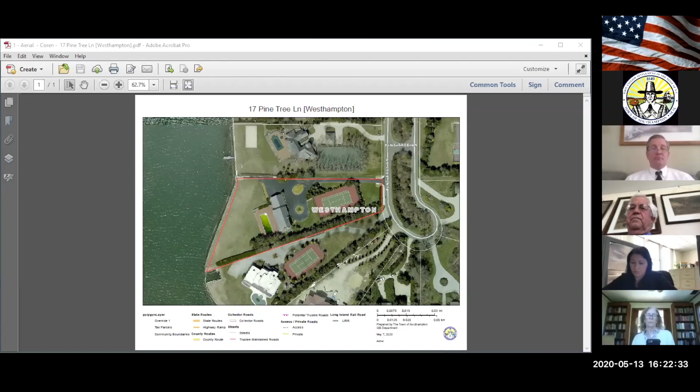Good afternoon, Marty Shea, Chief Environmental Analyst for the town. This is an application filed to gain approval to undertake residential improvements at an existing developed property. The applicant is seeking a wetlands permit in order to demolish and replace the existing pool as well as the associated deck. They're looking to significantly reconfigure the driveway. They're also planning extensive accessory improvements landward of the residence.

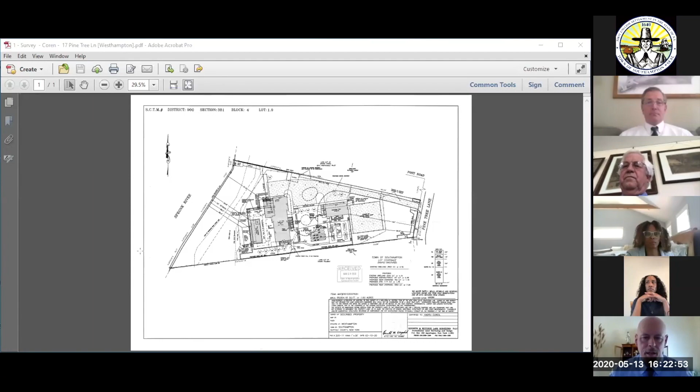As you can see by the survey and the aerial photograph, this property is characterized by a bulkhead. The bulkhead was failing, so the Board of Trustees issued a permit to replace it. When I completed the site inspection, work was underway on that bulkhead reconstruction. I had recommended to the applicant that they establish a covenanted, naturally vegetated wetland non-disturbance, non-fertilization buffer extending 50 feet landward of the bulkhead in order to mitigate potential adverse wetland impacts.

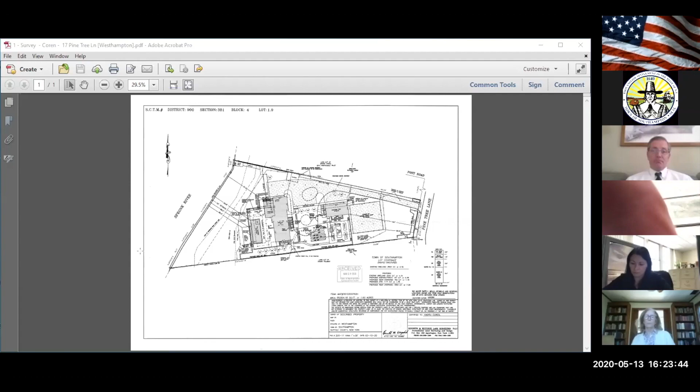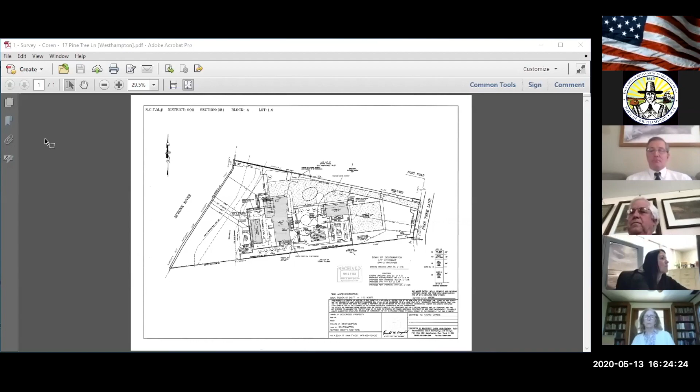I'm happy to say that the applicant has since come back with a revised survey showing that recommended buffer. They've also provided an acceptable revegetation plan, as the buffer area is currently characterized by lawn. The existing lawn is going to be removed and replaced with native plants. The project plans as currently proposed do meet the standards for issuance of a wetlands permit, and we have sufficient information to make a determination on the application. As such, I'm recommending that the hearing requirement be waived.

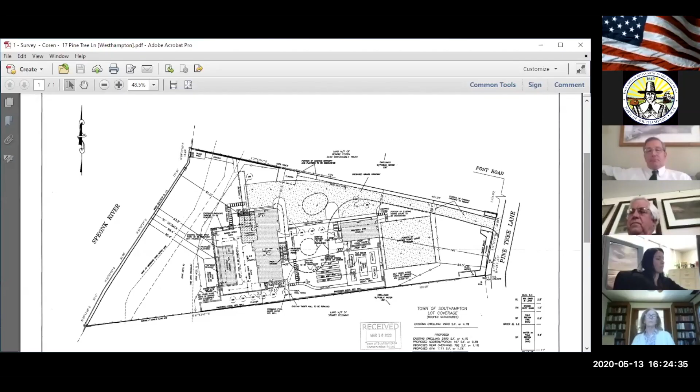The next application is A190130, Stephen E. Summer, and the applicant requests a postponement.

Is there a motion to postpone? So moved. Second. All in favor, say aye. Harry Ludlow, aye. Tom Rickenback, George, aye. Hine, aye. Jeremiah Collins, aye. Mike Tessitore, aye.

The next is A19068, LWF Enterprises LLC. As indicated by the visual, this application relates to a property located at 40 Shinnecock Road in the hamlet of East Quogue. The property is bulkheaded and contains town-regulated tidal wetlands. The application has been filed in order to legalize the redevelopment of this property.

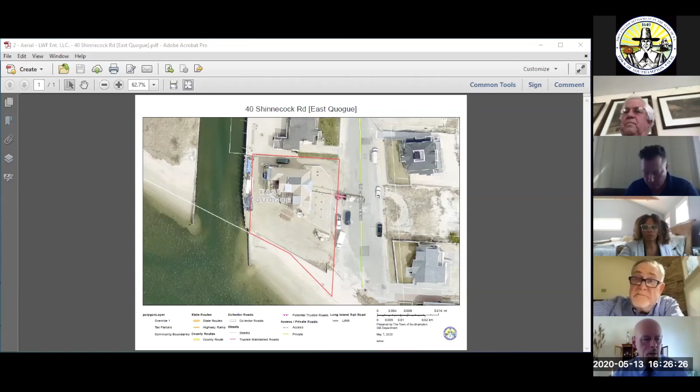The Conservation Board had previously issued a permit to authorize that redevelopment. However, when the property was inspected by my office in order to see whether or not we could close out the permit and issue a certificate of wetland compliance, we found that significant modifications had been made to the residence that needed to be legalized and authorized by this board.

The Board of Trustees had issued a permit to allow for a bulkhead reconstruction. Those activities had resulted in significant disturbance of covenanted, naturally vegetated wetland non-disturbance, non-fertilization buffers, whose establishment was a condition of prior Conservation Board permits. So we advised the applicant that they needed to submit a new application to this board in order to rectify the matter of the disturbance in order to legalize the completed construction.

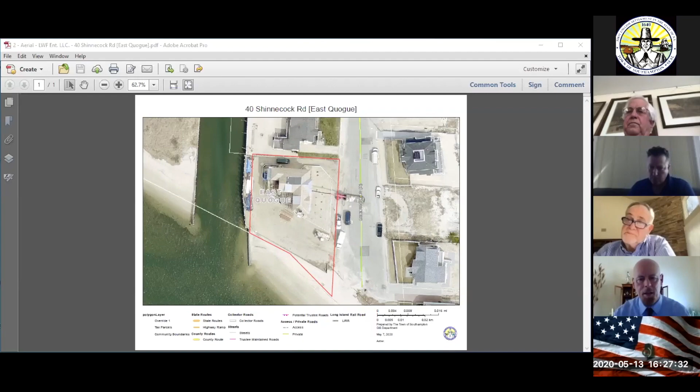Although we had significant concerns about the backfill for the bulkhead, when I recently visited the property, I found that as a consequence of wind and water erosion, the impacts of the backfill had significantly lessened. The buffer by planting grass is consistent with my requirements.

While there was a need to replant portions of the buffer and also to remove an unauthorized hard surface walkway within the buffer, the applicant has since complied with my request and completed that reclamation. So although the project was modified, its impacts are being sufficiently mitigated by the establishment of these restored buffers. So there are no other outstanding issues at this property. We have sufficient information in order to make a determination.

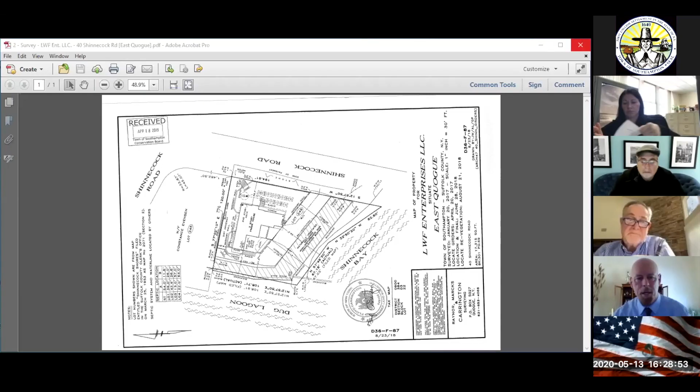As such, I'm recommending that the public hearing requirement be waived. Motion to waive the public hearing. Second. All in favor of waiving the public hearing, say aye. Harry Ludlow, aye. George Hine, aye. Jeremiah Collins, aye. Mike Tessitore, aye.

Next application is A019073, Blair Mezibov and Jenna Klein. This application relates to a property at 8 Jagger Lane in the hamlet of Westhampton. The proposed action is classified as a type 2 action pursuant to SEQRA. There is a preliminary advisory report on file. We're fortunate to have with us this afternoon the architect for the project and the owners of the property as well.

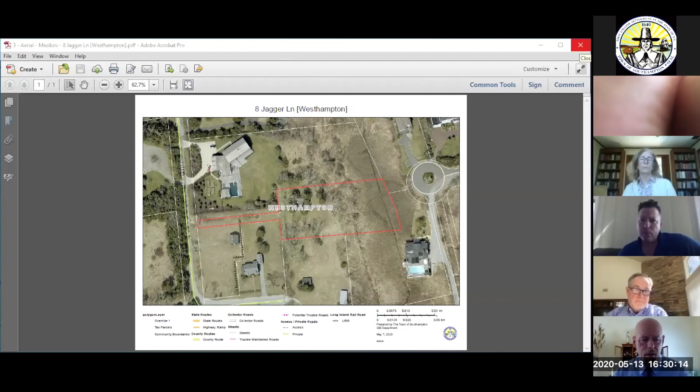The parcel is characterized by a small one-story residence. The applicant had commenced improvements to that residence, including conversion of a front porch area to living area, and had also commenced work on a rear porch area. As a consequence of that commencement, without the required approvals, the landowner did receive a notice of violation.

The applicant, as you can see by the survey, is seeking approval to retain the existing residence, but to elevate the house so it's FEMA compliant, and also to expand the house in the front and rear, as well as to build a swimming pool and various deck areas.

There is an existing sanitary system located close to the wetlands. The wetlands consist of town and state regulated tidal wetlands, primarily reedgrass marshes and high marsh. Those wetlands act as an essential tributary to the Moriches Bay.

The house that exists on the parcel today could be characterized as pre-existing non-conforming in that it doesn't comply with the minimum required 100-foot wetland construction and 75-foot natural buffer setback requirements as set forth in the permit issuance standards in Chapter 325.

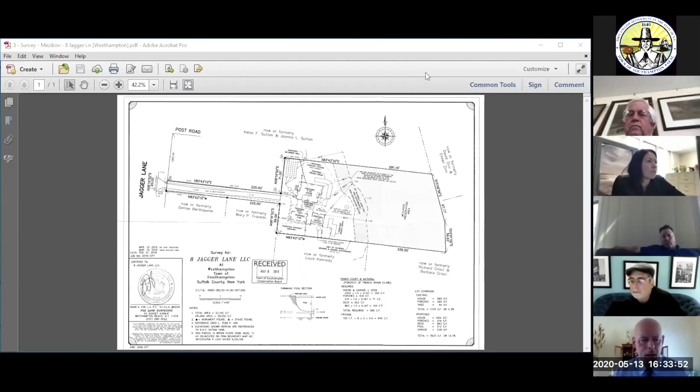As the board knows, where you can't meet the required wetland setbacks, the law asks that the applicant undertake a practicable alternatives analysis to see whether, upon redesign of the project, the wetland setbacks and naturally vegetated buffers could be increased in size and thereby maximized.

The applicant is currently only proposing a 25-foot wide naturally vegetated buffer as opposed to the required 75-foot buffer.

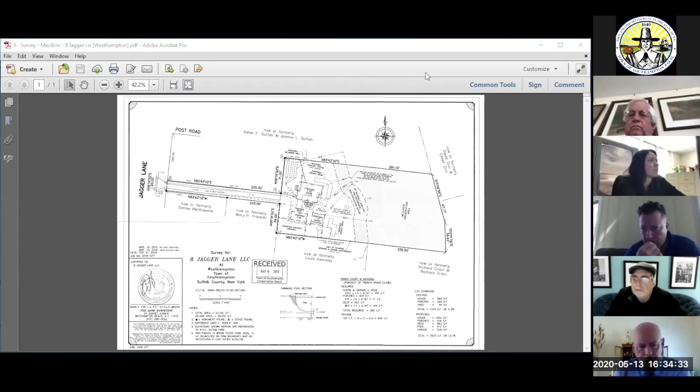The changes that I'm recommending, if indeed the applicant wants to retain, elevate, and expand upon the existing house, are somewhat minor. If you look at the southeast corner of the house, you'll see what's identified as a porch area. The applicant is looking to convert that area to a living space.

Upon inspecting the property, I found that that structure is open and exposed and in a significantly deteriorated state. It's within close proximity to wetlands. So if the residence was expanded to create a master bedroom, which is currently proposed in that area, essentially that porch footprint would need to be reconstructed.

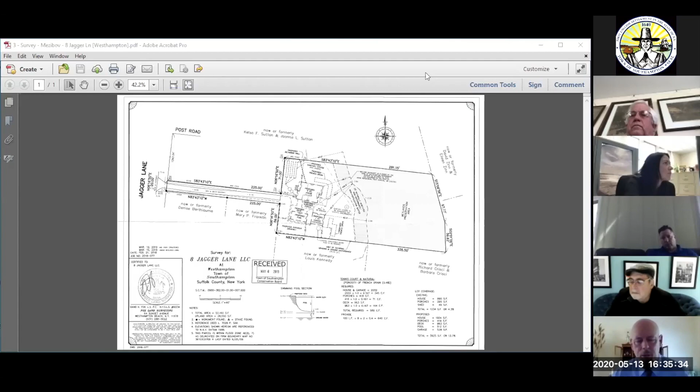As you can also see on the survey, there's a minor addition proposed on the west side of the house, on the landward side of the house.

The pool, as proposed, is located approximately 97 feet from wetlands and is currently less than 20 feet from the proposed innovative alternative on-site wastewater treatment system.

So I have asked that the applicant consider reducing the footprint of the house and the pool, not only to provide a minimum 20-foot setback from the septic system as required by the Suffolk County Department of Health Services, but also that the pool be reduced in size to accommodate a minimum 100-foot wetland construction setback. I've also asked that the applicant give consideration to creation of an expansive buffer area.

The advisory permit describes that buffer area, which would extend within close proximity to the planned swimming pool. It would require that the shed, which is already being relocated, be sited further landward.

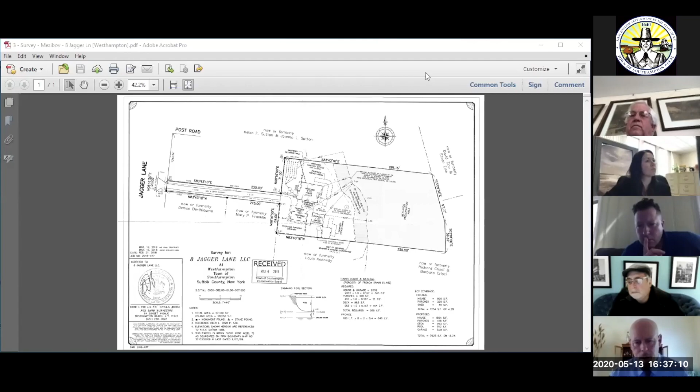The buffer would come within, at its closest point, about 5 to 10 feet from the east side of the house. Then at the northeast corner of the house, it would angle to the northwest, with the goal being to create an average overall buffer width of 75 feet.

Which the law requires when you can't establish a straightforward 75-foot buffer. So as indicated by the advisory report, this is an application for which significant additional information is needed from the applicant in order to make a determination. As such, I'm recommending that a public hearing be held.

As indicated, the applicant's architect and the landowners are with us this afternoon, so I'm not sure whether they've asked to speak as part of this preliminary review. I know it's not standard practice for the board to entertain comments from the public as part of the preliminary review, but they are present with us tonight for this application. Unfortunately, we're not going to be able to hear any testimony, but we can certainly schedule a public hearing.

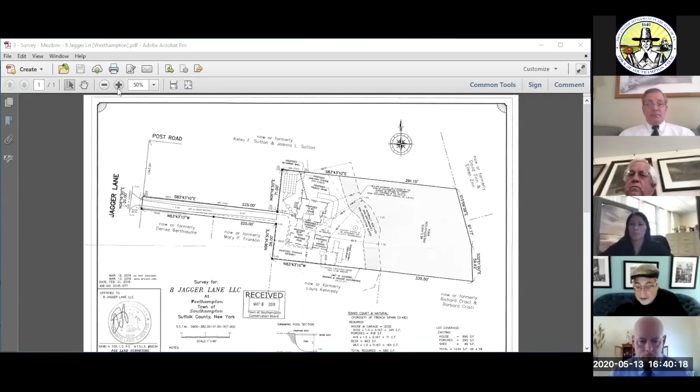But my question to Mr. Shea is, does he have our recent site plan submittals? That survey is not from us, it's from 2019. We've submitted significant changes since then, showing a proposed 2-story house.

So, I mean, I think that's the question we have to know. Is this what he's presenting?

All right, I'd be happy to respond to that question. It's Marty Shea, Chief Environmental Analyst for the town. The survey you're seeing as visual is indeed an outdated survey. It's not the most up-to-date survey and site plan that has been provided by the applicant.

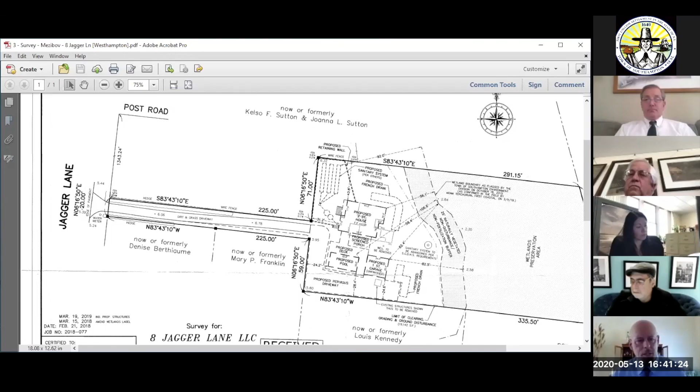The preliminary advisory report, which is on file, does reference the most recent submittals on part of the architect, and my recommendations are based upon the most recent submittals. Just for the board's information, the applicant, since the application was first made, received several notices of incomplete application. So the site plan and survey did indeed change significantly since the start of that process.

And again, the survey you're seeing before you is not the most recent survey or site plan. As indicated, contrary to that survey, the applicant is seeking to retain the existing house and elevate it, and is seeking approval of minor additions, converting portions of the existing footprint to living area. If you look at that survey, the detached garage is no longer part of the applicant's plan. The proposed pool has been shifted eastward to allow for installation of the I/A OWTS in that location.

So to answer the architect's questions, as confirmed by my preliminary advisory report, all of my comments and recommendations are indeed based upon the most recent site plan submittals by the applicant. And if we do have opportunity to hold a public hearing on this application, those most recent site plan drawings will be presented to the board at that hearing.

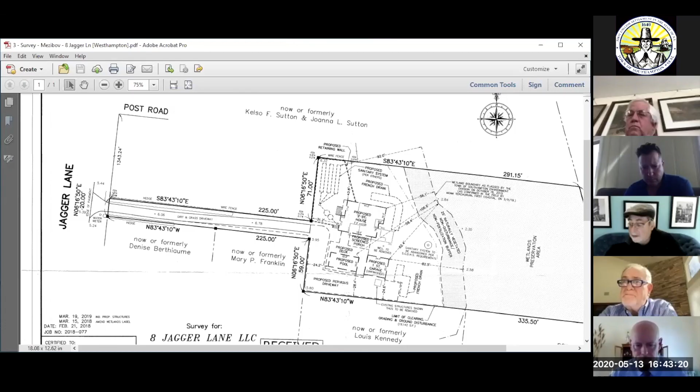So, can I respond? You may respond. Let's not get into the details of the application so much as the procedure. Okay, that's what we're trying to understand here.

We've made our submittals. We believe we were conforming, and we can understand his comments, but are we not looking at or addressing the site plans we're proposing? I find that rather strange to do. That second document you put up isn't our site plan either, or our survey.

What you were recommending is additional setbacks from the wetlands. Am I correct on what I'm hearing?

Just to respond to that, Marty Shea. I'm only recommending a slight shifting of the swimming pool. I'm recommending that the plans for elevation in the home and expansion be approved with the exception of the planned master bedroom area in the southeast corner of the footprint of the existing former porch area.

That porch area, most of its exterior walls are gone based upon my inspection. What remains of the structure is being held up by some hastily installed wood posts and concrete footings. In the interest of maximizing the setbacks, I'm recommending that the intended conversion of that southeast porch area be abandoned, acknowledging that this project change would result in loss of needed living space.

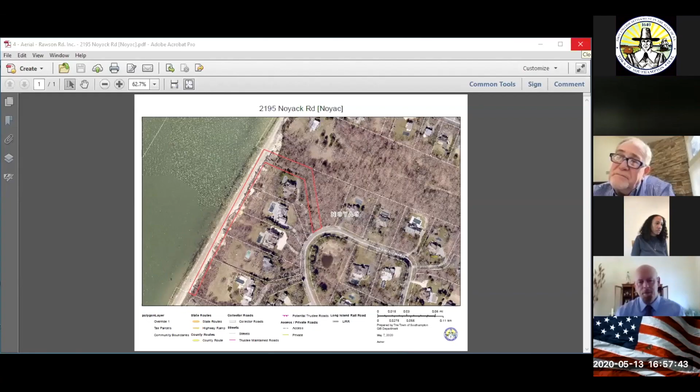When we looked at the prior Conservation Board history, we found that the board had allowed the use of some boulders in years past as part of a shoreline stabilization plan. However, upon visiting the site, we found that the association had installed significant supplemental boulders whose presence now needed to be addressed and rectified as part of the application to reconstruct the stairway.

We found that the boulders also extended upon the MIR Noyac Realty property, which, as you can see, is a residentially developed piece. That property also has a bluff beach access stairway that was significantly damaged by bluff erosion and storm events, and thus needs to be significantly repaired or reconstructed.

When the applicant's agent changed, so that the agent now is Land Use Ecological Services for both of these applications, so because the unauthorized rock placement extends on both of these properties, we asked Land Use Ecological Services that they address the boulders as part of their two separate applications for repair or reconstruction of the walkways.

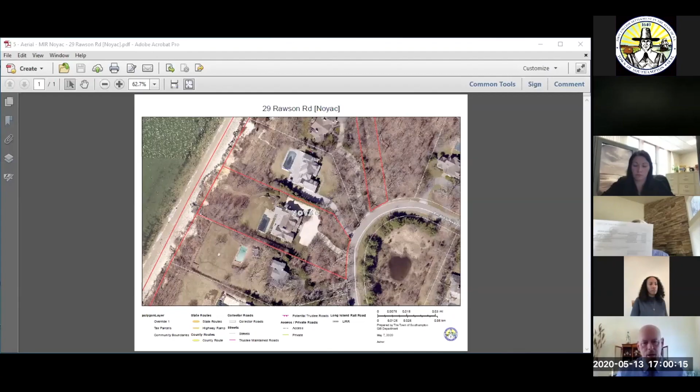As the Conservation Board typically has significant concerns about shore armoring, and particularly placement of large quantities of boulder along the shoreline because of the adverse impacts that those boulders can have on tidal wetlands, inclusive of the beach and the bluff area, my advisory reports provide a host of recommendations in terms of practicable alternatives that need to be explored in terms of shore stabilization.

A more naturalized plan for shore stabilization that would allow for retention of some of the existing boulders, but would call for removal of a large quantity of the boulders and for the use of cut trees and brush, sand backfill, and native revegetation in order to stabilize that area.

Land Use Ecological Services, upon receiving my combined advisory report which recommends that a joint public hearing be held, expressed concern because they felt that requiring the necessary additional information for the MIR Noyac Realty property would take considerably more time than providing necessary information for the Rawson Road Association property. So while they agree it makes sense to consider shore stabilization for both properties simultaneously, their preference is that we schedule and hold separate public hearings for these two applications.

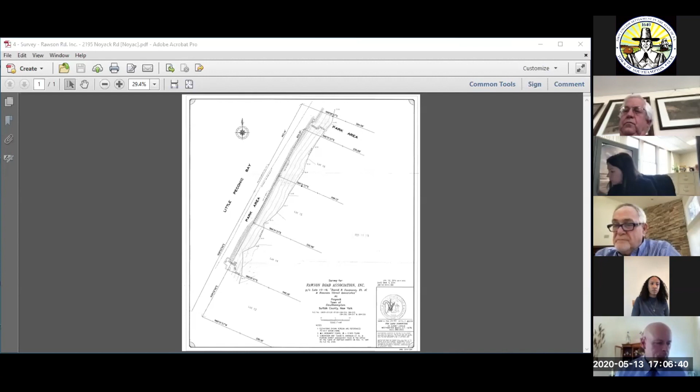Motion to schedule a public hearing for June 24th, 2020. It's been moved and seconded. All in favor, say aye. Harry Ludlow, aye. Rickenback, aye. George Trine, aye. Jeremiah Collins, aye. Anna Jerry, aye. Mike Tessitore, aye.

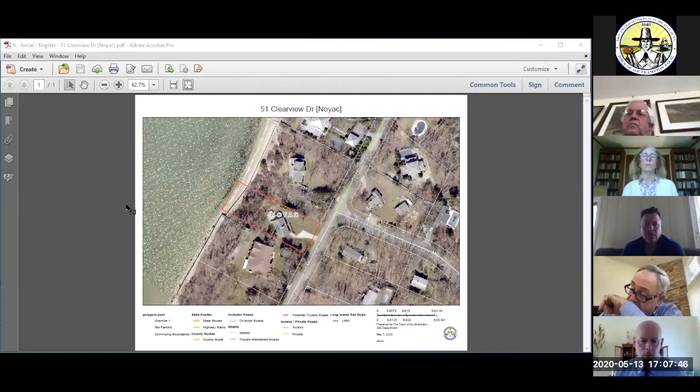Thank you. So the next preliminary review of SEQRA determination is A020011, Peter, Paul, and John Engster. Marty Shea, Chief Environmental Analyst for the town again. This application relates to an existing residentially developed property at 51 Clearview Drive, Noyac. The subject property contains a bulkhead, a bluff, and beach along the Little Peconic Bay. The application has been made in order to legalize the reconstruction of the bulkhead at the property.

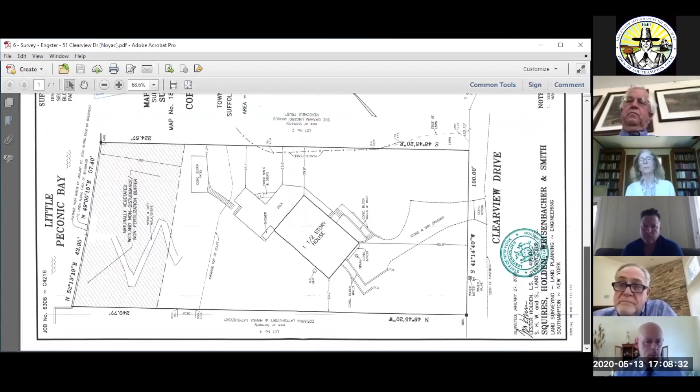The bulkhead reconstruction needs to be authorized by the town Conservation Board rather than the Board of Trustees, because Little Peconic Bay is state waters and the trustees do not own the bay bottom. There was formerly a timber bulkhead on the property that failed, which was reconstructed around 2001. There is now a vinyl bulkhead in place that needs to be legalized. When the bulkhead was reconstructed, they added a wooden cap using treated lumber. The wood cap was heavily damaged by storm events and needs to be replaced.

The applicant has agreed to replace that wood bulkhead cap with an untreated lumber cap. The property does have some history before this board. The board had acted on a prior application for removal of some structures and installation of a bluff access walkway. That permit was conditioned upon establishment of a covenanted naturally vegetated wetland non-disturbance, non-fertilization buffer that, as depicted on the survey, extends 50 feet landward of the bulkhead. The applicant has agreed with all the recommended mitigative measures.

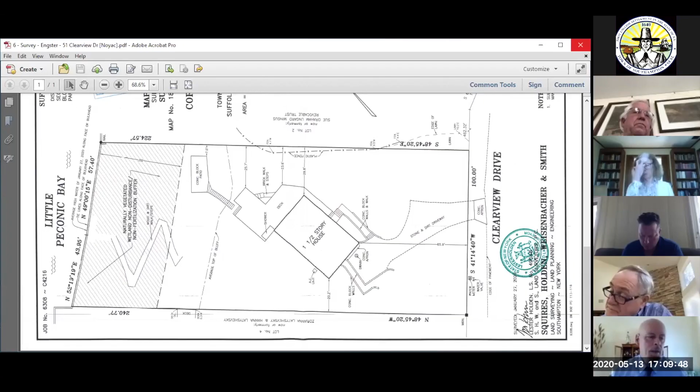This is an application for which we have sufficient information to make a determination. As such, I'm recommending that the hearing requirement be waived. Motion to waive public hearing. Second. All in favor? Harry Ludlow, aye. Tom Rickenback, aye. George Hein, aye. Jeremiah Collins, aye.

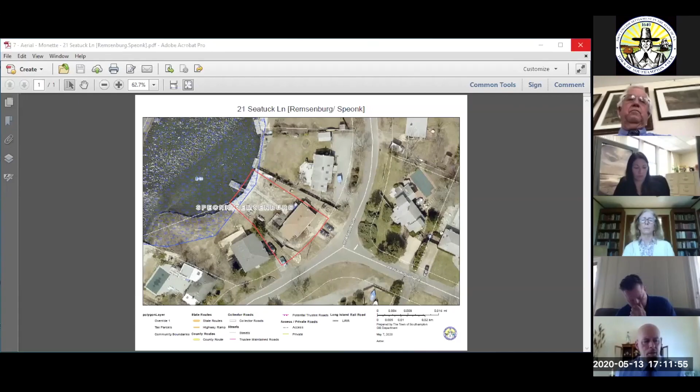So the application has been made in order to legalize the reconfigured deck on the seaward side of the house. If you were to visit the property, you would see that along the bulkhead, there's a significant amount of wood debris that's been at the site since Hurricane Sandy.

I have recommended that the impacts of the deck reconstruction be mitigated by establishment of a 15-foot wide covenanted naturally vegetated wetland, non-disturbance, non-fertilization buffer. That buffer would extend 15 feet landward of the bulkhead.

The wood walk is not actually there today, it was destroyed by Sandy. I've asked that the wood debris be removed from the recommended buffer area and that the buffer area be restored by planting native vegetation. There is a swing set that doesn't show in the survey that just needs to be shifted a little further landward.

The applicant has also, consistent with my recommendations, installed subsurface drainage chambers for containment of runoff. This is an application for which we have sufficient information to make a determination. The action is a Type 2 action pursuant to SEQRA, so it's not subject to SEQRA review. Accordingly, I've recommended that the public hearing requirement be waived.

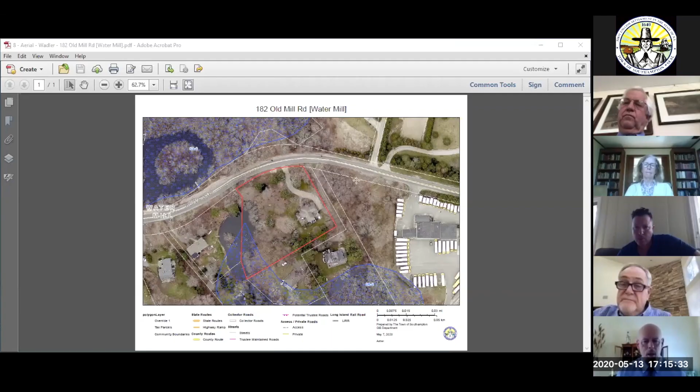The issuance of the permit was conditioned upon the applicant coming forward with the necessary revised surveys and covenant. Rather than go that route, the applicant, I found upon inspection, had commenced construction of the pool. After the administrative wetland permit was issued, the applicant decided they wanted to expand upon that work, to construct a pool patio and outdoor shower area on the east side of the residence.

I found that that construction would be located within 100 feet of freshwater wetlands to the east on property owned by the Union Free School District. The applicant had initially appealed my wetland determination with regards to those freshwater wetlands.

They had not actually filed a formal appeal application. I had requested that they submit a wetland boundary flagging application. They submitted it. I had requested permission from the school district to go on their property for the purposes of flagging the wetlands, so that the applicant's surveyor could pick up that line and show the setbacks from the planned outdoor shower and patio area.

In the interim, the landowner came forward and met with me and said that notwithstanding his agent's appeal of my finding the wetlands on the abutting property to the east, he wanted to proceed with getting approvals for the patio and outdoor shower. I recommended that he file a new Conservation Board wetland permit application, and indicated that if he filed that application, there would no longer be a need to flag and have surveyed the wetlands on the approximate school district property to the east.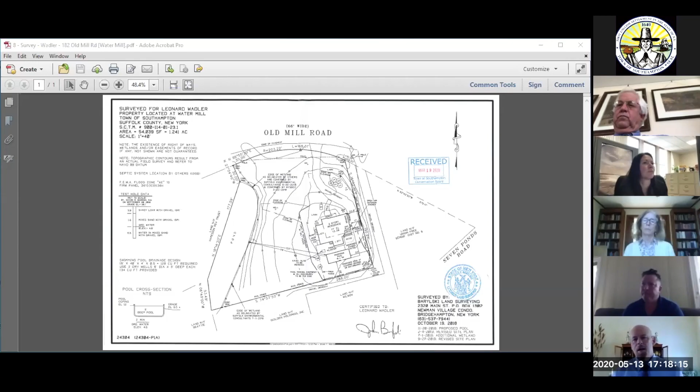This is an application for which we have sufficient information to make a determination. As such, I'm recommending that the public hearing requirement be waived.

Motion to waive the public hearing? Second. All in favor, say aye. Harry Ludlow, aye. Tom Rickenback, aye. George Heine, aye. Jeremiah Collins, aye. And Ellen Jerry, aye. Mike Tessitore, aye.

We'll move on now for resolution issue modification, A019124, Diane Ardolino. Marty Shea, Chief Environmental Analyst for the town again. This application relates to a property at 160 Point Road in the hamlet of Flanders.

Property contains town-regulated tidal wetlands. The applicant had previously sought and obtained a conditional approval in order to build a single-family residence on the property and to install an IAOWTS. The applicant had agreed to establish covenanted buffers and wetland preservation areas as a condition of that permit. However, the Suffolk County Department of Health Services required that the IAOWTS be resited on the property, and that the proposed private well be located within the bounds of the required covenanted buffer.

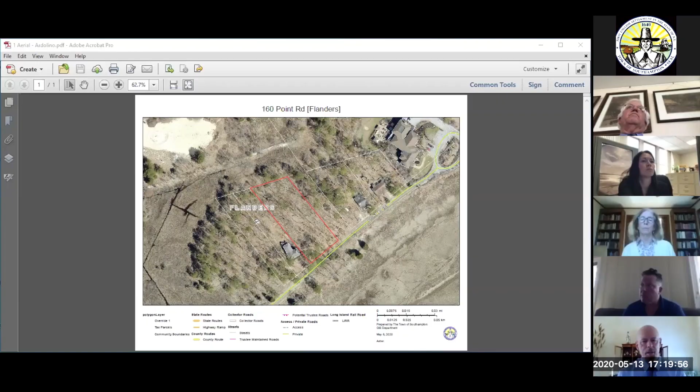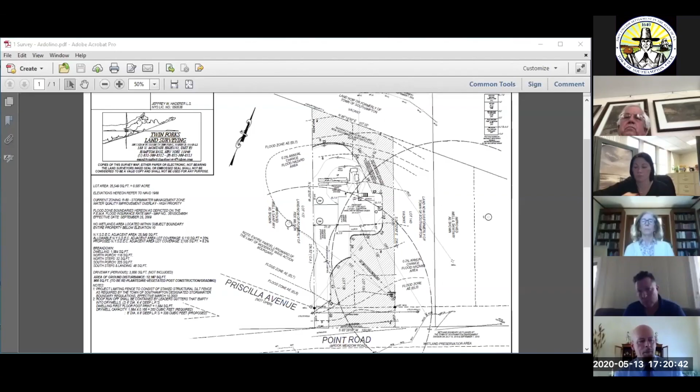My office has no issue with the recommendations of the County Health Department, nor with the requirement that the well be installed within the buffer. I have advised the applicant that the covenant will need to contain special language in order to allow for that well installation. The survey before you shows the extensive buffer that's being required on this property, which will be sufficient to mitigate potential adverse wetland impacts. So there is no aspect of this application that would require that you revisit the issuance of the original conditional approval.

The changes to the project will not result in new adverse wetland impacts. As such, I'm recommending that you approve the requested modifications to the conditional approval so that we can move forward with issuance of the permit and review of the draft covenant, and allow the landowner to go forward with building a house on this property.

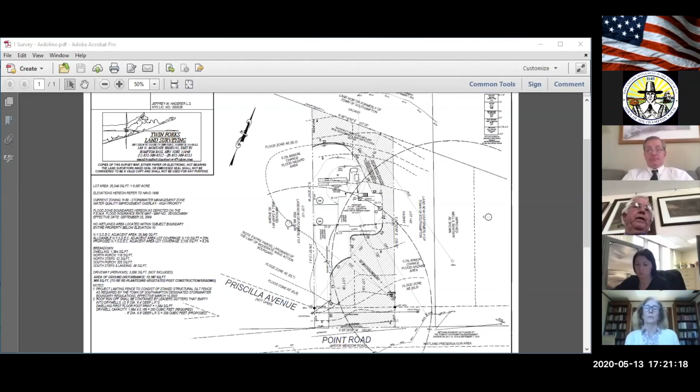Motion to issue the modification. Second. Resolved that a conditional wetland permit approval be granted to Diane Ardolino for the proposed project upon the terms and conditions set forth therein. All in favor? Aye. Harry Ludlow, aye. Tom Rickenback, aye. George Heine, aye. Jeremiah Collins, aye. And Ellen Jerry, aye. Mike Tessitore, aye.

CB 1500092, Barry Ulrich and Joanne Ulrich. Marty Shea, Chief Environmental Analyst for the town. This application, as indicated by the aerial, relates to a property in Noyack that has town-regulated freshwater wetlands. The board had issued a permit in order to allow for redevelopment of this property.

Upon inspection, to see whether or not we could issue a certificate of wetland compliance, we found that there were minor modifications that were made to the patio, outdoor shower, gas line, paver walks, and barbecue that required that a modified wetland permit be issued. This, I believe, would be at least the second modification to the existing permit.

The modification would not result in any new adverse wetland impacts. And there's no reason to revisit the issuance of the original permit. As such, I'm recommending that you act on the resolution to approve the modified permit.

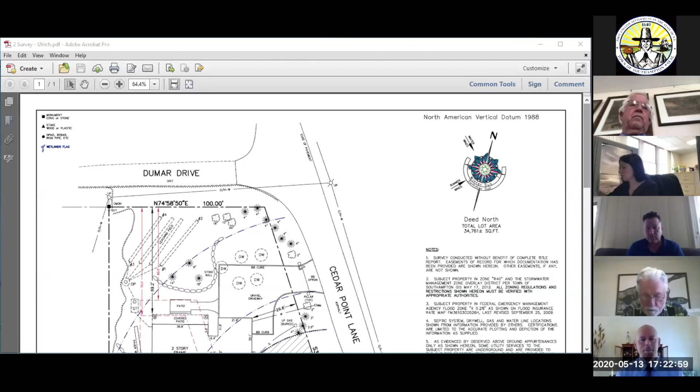Motion to issue the modification. Second. Resolved that a conditional wetland permit approval be granted to Barry Ulrich and Joanne Ulrich for the proposed project upon the terms and conditions set forth therein. All in favor? Harry Ludlow, aye. Tom Rickenback, aye. George Heine, aye. Jeremiah Collins, aye. And Ellen Jerry, aye. Mike Tessitore, aye.

CB 19069 Quinn Murphy. That's the last modification. Marty, the Quinn Murphy. The last modification should be Quinn Murphy. Yes. Okay, I'm sorry.

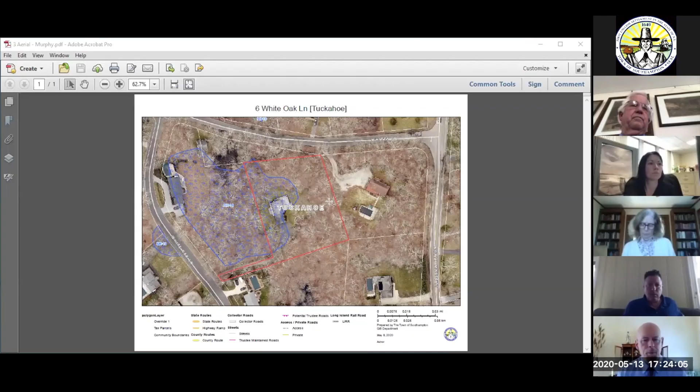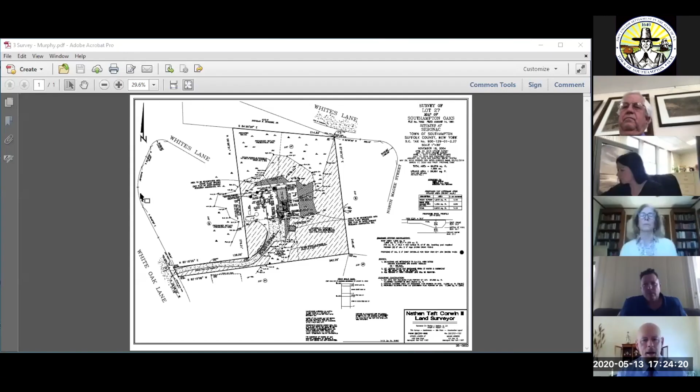The Quinn Murphy modification, as you can see, relates to an existing residentially developed property. The board had issued a permit in order to allow for construction of a pool and deck area. That permit was conditioned upon establishment of an extensive covenanted naturally vegetated wetland non-disturbance, non-fertilization buffer, as well as extensive native revegetation. The applicant had recently indicated that he needed to install a new propane tank as an emergency, as the house lost its heat.

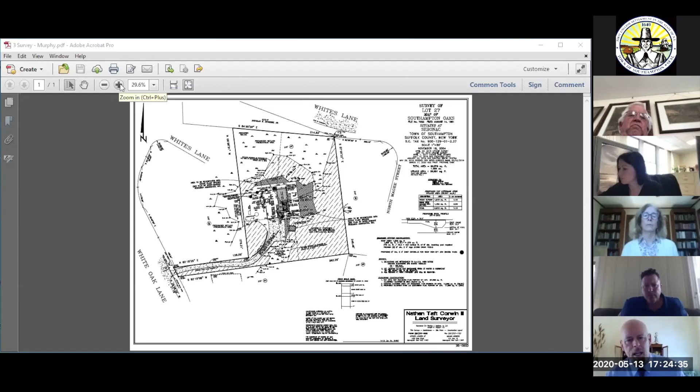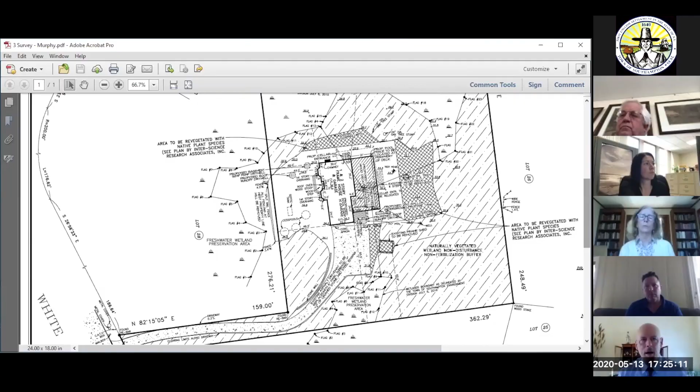While I did allow the applicant to go forward with the installation of the propane tank so that they could continue to live in the home, I did advise the applicant that he needed to get a modified permit. He's filed the subject application. The installation of the propane tank is outside of any of the restricted covenanted areas and is not going to result in any new adverse wetland impacts. Accordingly, the resolution before you is to allow for issuance of the necessary modified wetland permit in order to authorize and legalize the propane tank.

Motion to issue the modification. Second. Resolved that a conditional wetland permit approval be granted to Quinn Murphy for the proposed project upon the terms and conditions set forth therein. All in favor? Aye. Harry Ludlow, aye. Tom Rickenback, aye. George Heine, aye. Jeremiah Collins, aye. And Ellen Jerry, aye. Mike Tessitore, aye.

Public hearing A019099, Michael McLarney and Emily McLarney, the applicant requests an adjournment. Is there anyone in the public who'd like to speak on this application? Can you tell me the date of their request? Do we have a suggested date, either Marty or Karina? It's in your packet, let me pull it up. Hold on a second. September 9th. Okay, don't think we have any. September 9th? September 9th, okay. Motion to adjourn this hearing until September 9th, 2020. All in favor? Harry Ludlow, aye. Tom Rickenback, aye. George Heine, aye. Jeremiah Collins, aye. And Ellen Jerry, aye. Mike Tessitore, aye.